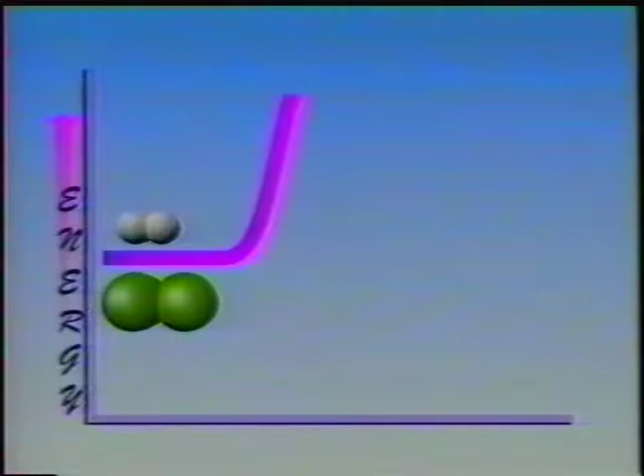Energy in the ultraviolet light breaks the molecules apart into atoms. When they react to form hydrogen chloride, the energy given out is released as the heat, light and sound of the explosion.

Heat, light, sound, explosions, such as the controlled explosions that drive the engines of cars. Everything that happens depends on energy transfer. Remember, energy transfers from high levels to low levels, becoming less and less useful as it does. So finally, will everything eventually run down?

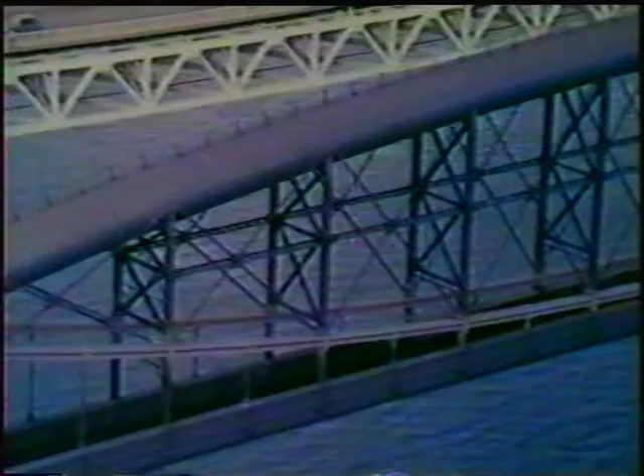But building it posed some major problems. Each of those spans weighs about 1,000 tons and is 150 metres long. They had to be built at ground level and then lifted into position, and also they had to be high enough so that large sailing ships could pass underneath.

Now this is a model of one of the spans, and remember that in reality these spans are incredibly heavy. This was actually built on the bankside, just where we are now, and you have to imagine that this is the bank, the span's sitting on it. How on earth did Brunel lift the spans off and get them into position?

Well, he'd got 1,000 tons here, about 150 metres, so he had big iron barges built, and he filled them with water, pumped water into them. So they were sitting a lot deeper in the water, floated them in under the span. And then he pumped the water out. Very clever. So they lifted up.

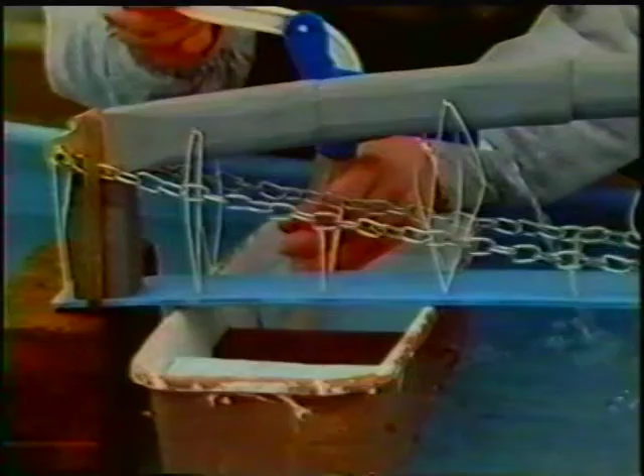But of course, in those days, they'd always choose water as a solution. They could use steam engines for pumping this, whereas we have to use these hand pumps.

Well, my end's coming up now. It's almost floating. How about yours? Yes, it's just about coming up there now. In a moment, we'll be able to float it out. So how did Brunel direct all this?

Well, just imagine it. It was a tremendous occasion with the great man himself standing there in the centre of the span. But it was absolute silence as he directed it, as if he was conducting a great orchestra. And they got semaphores and flags, all sorts of ways of getting messages to people, because there weren't any walkie-talkies in those days. It was a wonderful piece of organisation.

And then they pull them out on great ropes? Yes, once they'd got it floating, out it came. It floated off the bank on the barges, and they could haul it out with Brunel directing the pulling on the ropes, so they could pull it out, lower this enormous span down onto the base of the towers, and then they could start to celebrate.

They could make a noise again. But it must have been a wonderful sense of occasion that the Victorians had, a tremendous style that, in a lot of ways, I think we've lost.

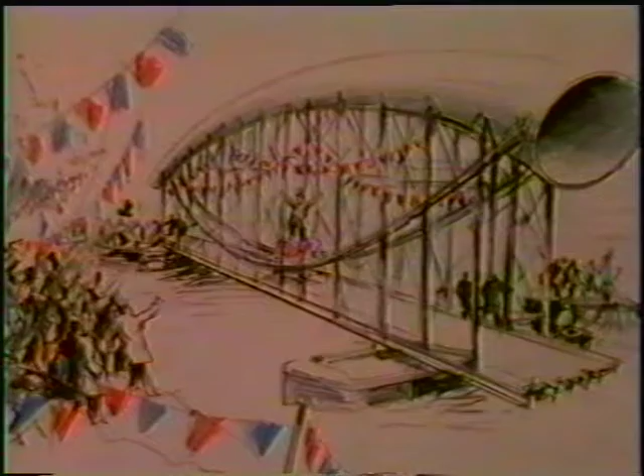Now, if you had to lift a really heavy weight a certain height, how would you go about it? That's the task for these 170 or so young problem solvers on day 3 of their course at Brunel University. This is the weight they've got to lift. Now, it's 52 kilograms, which is really quite heavy. It's almost as heavy as me, and I can't even budge it off the table.

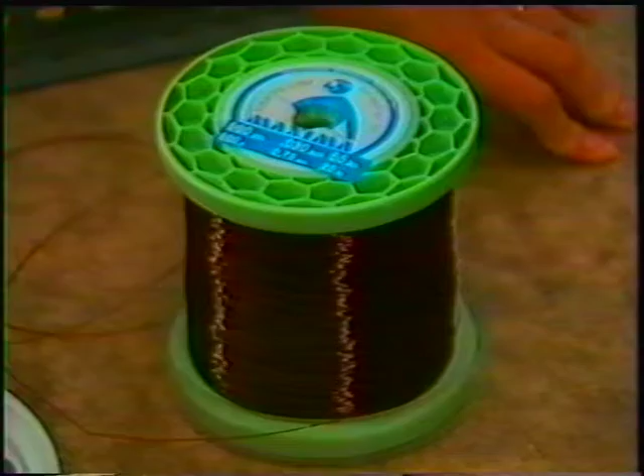So in order to lift it, they've been given these materials: some steel construction kit, including these strips, and the plates and nuts and bolts necessary to put it all together. Some fishing line, which, by the way, has only got a breaking strain of 25 kilograms - remember, that's a lot less than that weight. Some pulleys and spindles and the plates necessary for mounting them. Some casters so they can move everything around. And, of course, the tools.

Now, the idea this time is for each group to come up with a design that can be given to another group to construct. But there's more to it than just designing a method of lifting. We've got to lift it up out of a container, move it 30 centimetres and put it in another container.

How are you going to fix that? That's what I mean. Oh, you got bolts, haven't you? Yes, but fixing it at an angle, it's going to be unstable. Well, you get the trolley, it depends what we might have. If we have an A-frame. Yes, that's it, yeah. You've got the wire going up and over. So, you've got the pulley system here, a couple of pulley system here. So this some kind of on that handle attachment which you actually pull, which goes through the pulley system and then pulls it up.

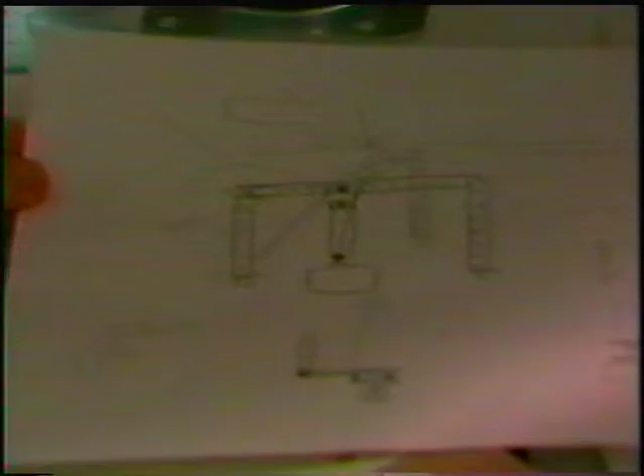That's brilliant, yeah. The cord we have only has a breaking strain of 25 kilograms, and the thing we have to lift is 52. So we've got three pulleys to split the strain.

What are you going to do with these plans, these sketches? These sketches are all being agglomerated into one main drawing, a sketch plan which will be given to the people to manufacture. Where do I get what from?

Communicating a design to a potential manufacturer isn't as easy as you might think. That's one, that's another, and that's another, but in the opposite, in that place. Is that section? Yeah, that's a...

It seems that most groups are planning to lift the concrete block with a pulley system. And then have pulley - I mean, we're not doing pulley, are we? Obviously, this group has a different idea.

Your 4 strings here, 2, 3, however you're going to tie that, that can be sorted out. And your 4 rollers, castors, on the spindle, going like that, coming out. So you have your 4 strings coming out, and you have your lever here. Yes, and it's all attached there. And then you've got much greater leverage than if you were doing it perpendicular. So you've got all this leverage here. So it's either a lever or a pulley system.

But are they sure the materials they're planning to use to do the lifting will take the strain? How's that going to hang in midair?

That is going to support 52 kilos, isn't it? Hopefully - well, it depends. The guy who said he knew about fishing said that they usually do underestimate the breaking strain - it's usually higher. And what about the design of the frame of the lifting device?

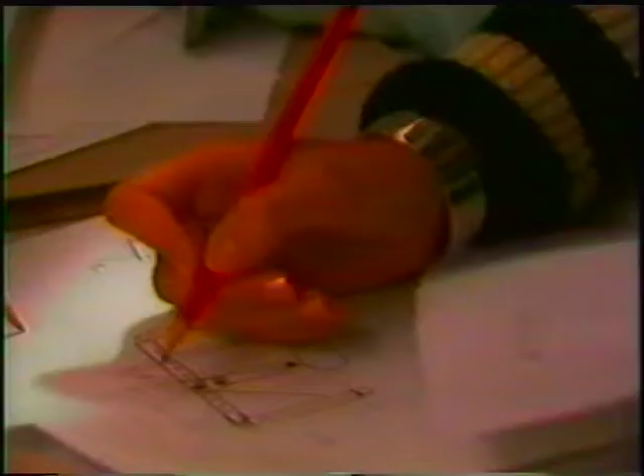I want you to explain to me how the Dexion is going to... Because there's one piece bolted together. If you bolted them together, yeah, these plastic end pieces won't fit on the top here. They don't have to because it's going to be covered.

It seems to have got quite a long way. Can you explain to me how it all works, lifting this heavy block? It's conventional third angle drawing.

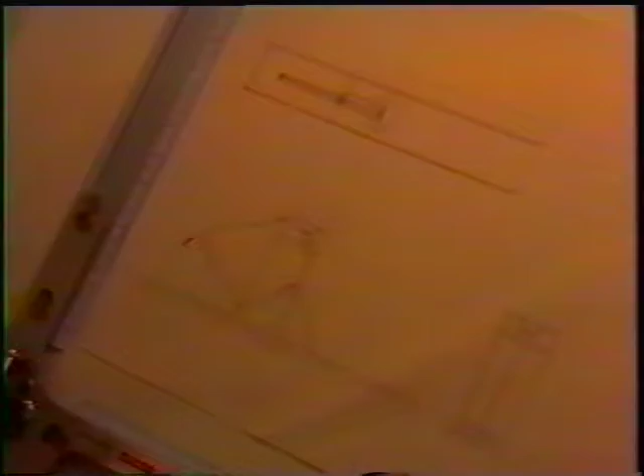All it is, is one drawing, or 3 drawings all in one. This is your plan, this is your side elevation, and this is your front elevation, as if you're looking at it from there. There's been a time limit - well, I'll let you get on because time's running out. That's right, they've had just 2 hours for the design stage.

These are the 6 designs selected which show devices to lift a concrete block. Let's take a look at one of them in detail.

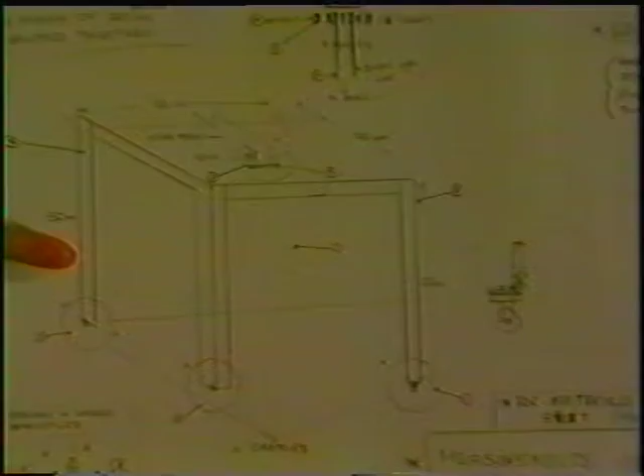This drawing shows the complete structure with measurements. Up here, we've got a detail which shows how the concrete block is attached to the lifting device. And over here, we've got a list of components and how much they're going to cost.

Now it's up to the groups to manufacture the various lifting devices that have been designed. Remember, each group has to work from another group's design, and they've got just 3 hours to do it in.

The first problem is going to be understanding the design instructions. You've just got your plans - what do you think of them? Well, we're looking for a list of what we've got to buy. Oh, I see, so really you don't understand what you need to start off with. Well, we've got to sort of count all the measurements out, so that they didn't miss anything out.

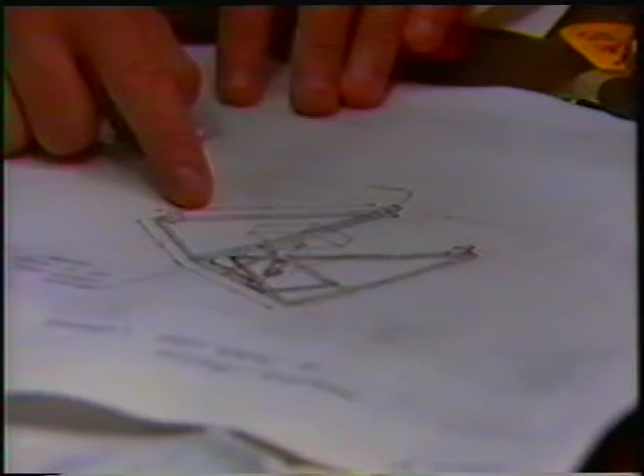What do you think of the plan as a whole? It looks understandable - that's a start. More than ours was. Wow, you think it's better than yours? Oh, definitely. They've also bodged up insofar as there's nothing to hold these from coming in.

Who chose this design? You're not looking really happy about your plan. No, we're not. Why, what do you think's wrong? Haven't taken a lot of things into account.

Yeah, I mean, fair enough, they couldn't actually work with the materials. They've told us to round off some of the materials - it's going to take us ages to file it down. They just haven't taken everything into account.

So it's a bit slap-happy. Yeah, you just have to make some modifications. They haven't. Modifications are allowed, but they'll be taken into account when the judges make the final assessment.

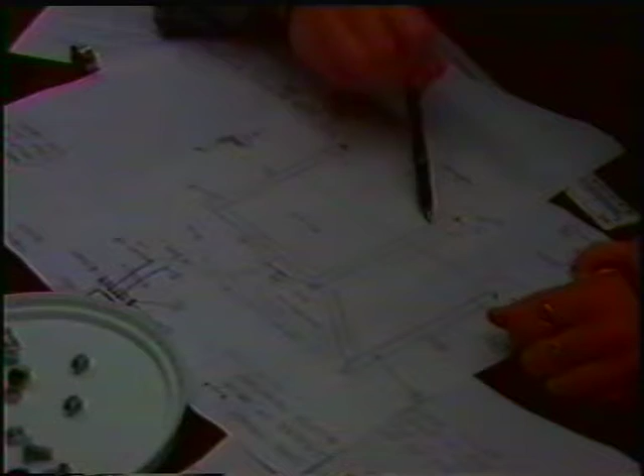Well, they haven't put anything about actually lifting it. This is their pulley design, and all it is for attachment onto the block, which would be sort of in the middle, underneath the frame. So we don't know how we're going to actually incorporate something else, modify this, so that we can actually lift it. Well, let's hope those problems can get sorted out during the making.

Does this match the plan which you were given? Not quite, we've made modifications. Can you show me what modifications you've made?

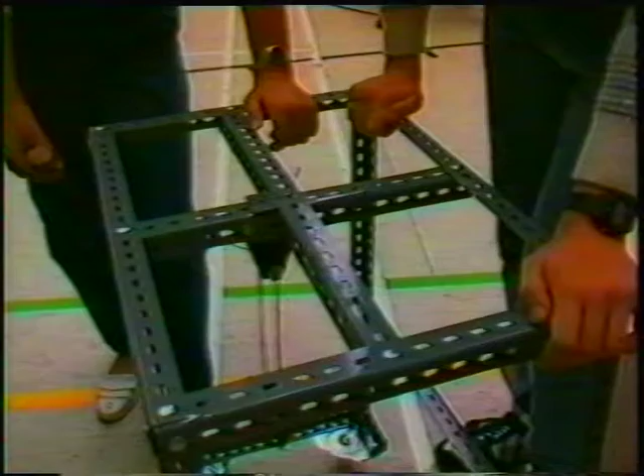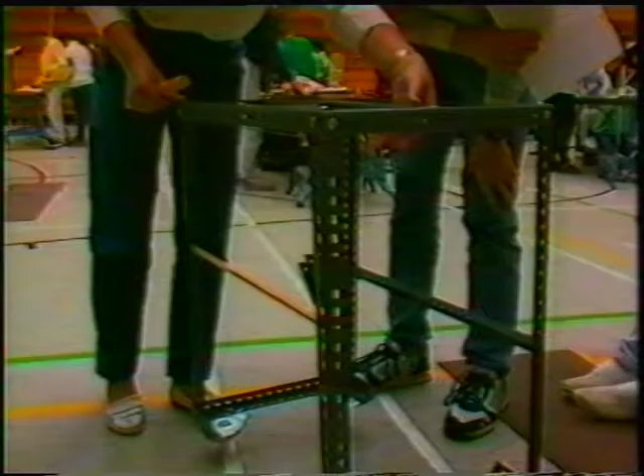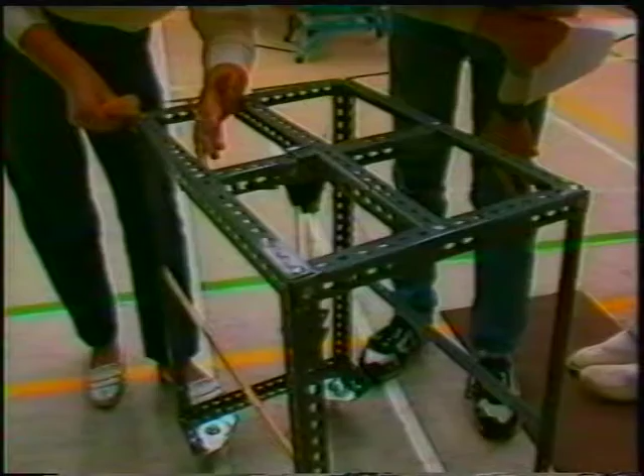One of the things was we removed the collar from the top one because we found it was a bit too broad to go in there. And on the design, there was a stub on these crossbars, another piece fitting around made into a U shape, but we thought we'd better leave that out because we would have used up more Dexion than we were permitted. So we eliminated that. We've also doubled this nylon cord for safety reasons, so if one snaps there's always a backup.

Sounds like a belt and braces policy. Well, this looks as though it's reasonably complete now. How's it going to work? Well, we can't push it over the block, we have to carry it.

The design has to allow the block to be raised at least 15 centimetres vertically, but it must also provide a means of moving it horizontally a distance of 30 centimetres. This looks like a novel way of doing it. Block like this underneath, the shackle goes right down here.

How did you find the design that you had before? All the measurements were too short, so we had to put legs on it. So you had to modify it somewhat? All of it.

Have you made any changes from what was on the original plan? Well, quite a few, we did have a major problem. Once we'd actually sorted out the size, we found we did have these plates fitted on here, this spindle down here.

But we were given a measurement, from the ground up to the bottom of the actual shackle which holds the block. And when we actually made it, we discovered that we did not have enough height, because before it couldn't go up any higher than the metal bar was down here, and there wasn't enough height, you see. So we had to abandon the idea of the metal bar, which did weaken it a bit.

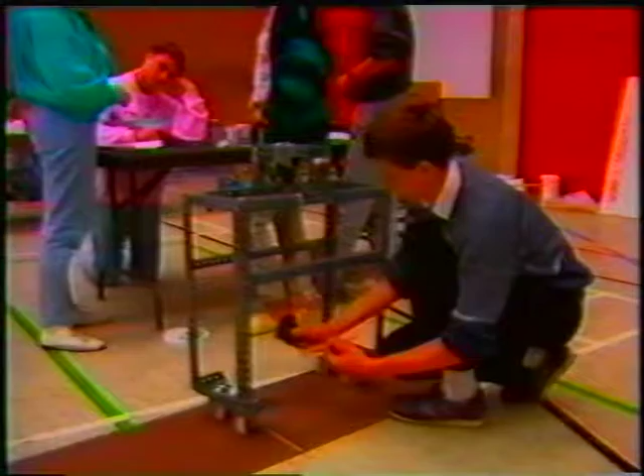So now we're hoping that the Dexion will actually support the weight from here, and we should just about make it by centimetres. Let's hope that'll do the trick. Well, this looks fairly sturdy. How is it actually going to work?

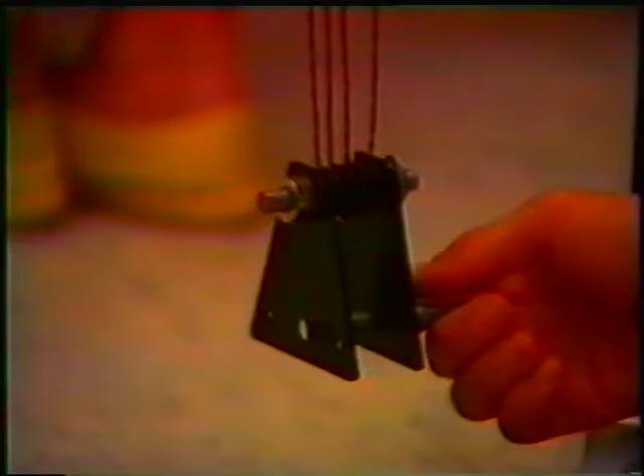Well, first of all, we shackle it onto here by taking this out, putting the shackle in there, and then slotting this through the shackle. So that's back on, and that will hold the weight. And then pull on this.

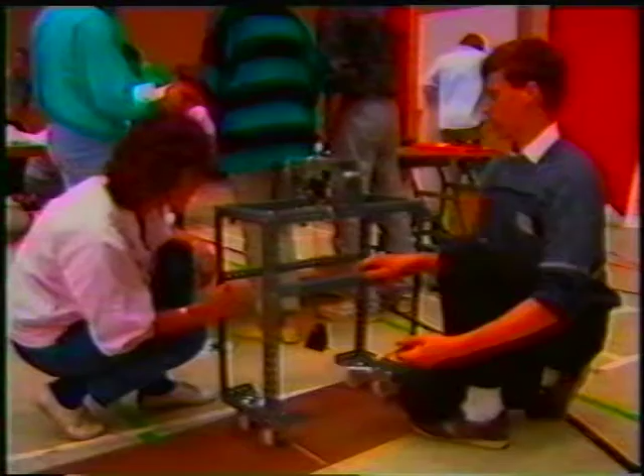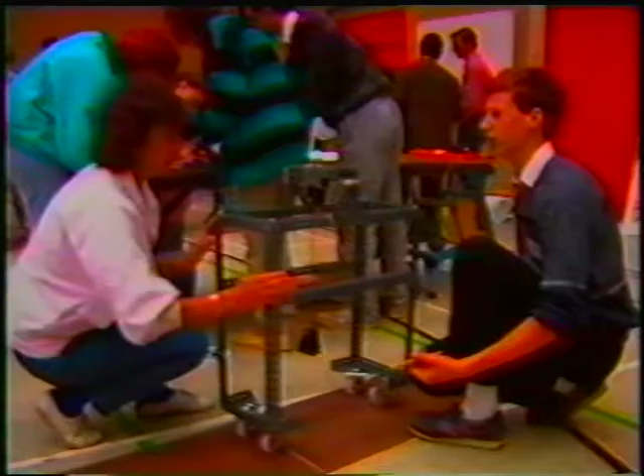And now for the judging. Well, the first thing they've got to do is pay their bills. Theirs cost $320, which is very expensive.

The cost of making each design is an important factor in the judging. The cheaper, the better.

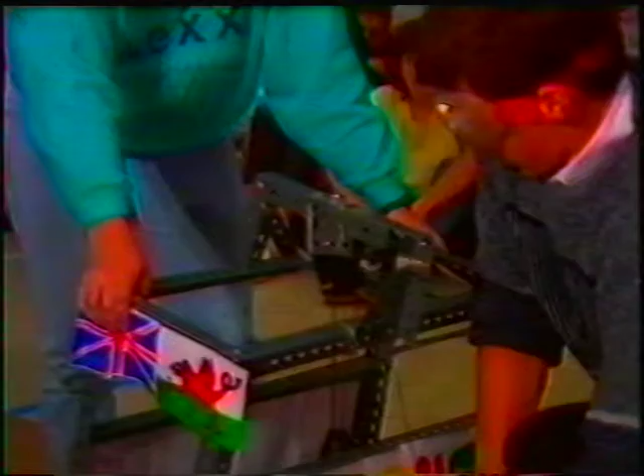For an expensive design, this one doesn't look too hopeful. Thank you very much.

Never mind, at least it wasn't their design, they were only the manufacturers.

A relatively cheap one now, $204. The first of the lever designs.

Success! Oh dear, what a pity.

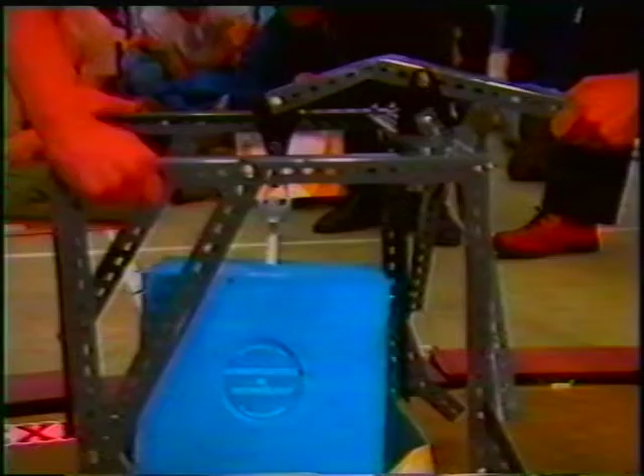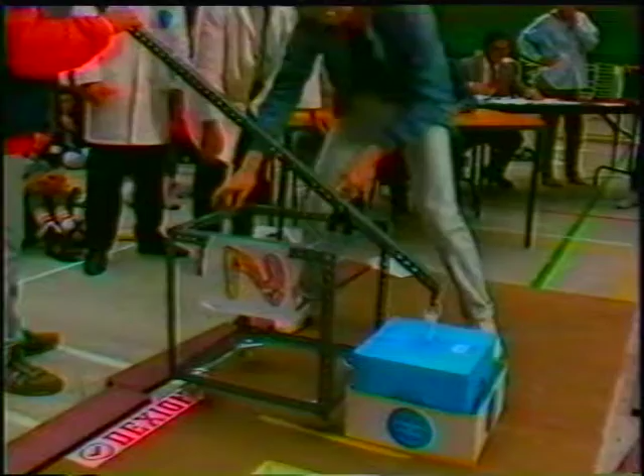Another inexpensive design on the lever principle. Oh dear, the same problem as before.

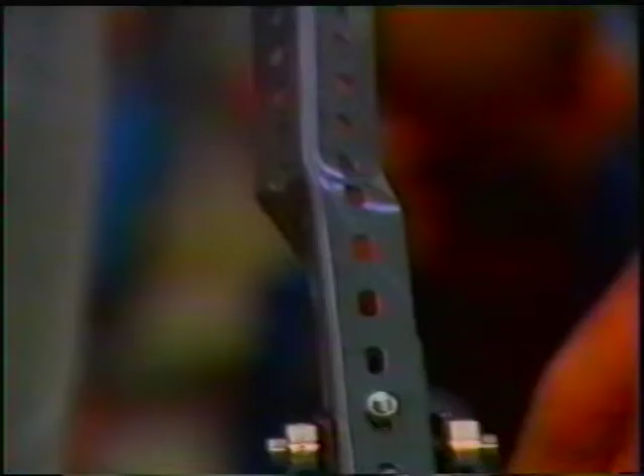This one costs $256. Safety's another important criterion. How safe is this one?

Now, will the fishing line take the strain? What's happening to the feet? Not his feet.

Can you see? But it's lifting. It's looking good, but oh dear, it's the mountings for the casters that won't take the strain. That's going to make it very difficult to move the device along.

They're succeeding. Now they have to lower the concrete block into the box.

Well done. The next lifting device cost $256 to build.

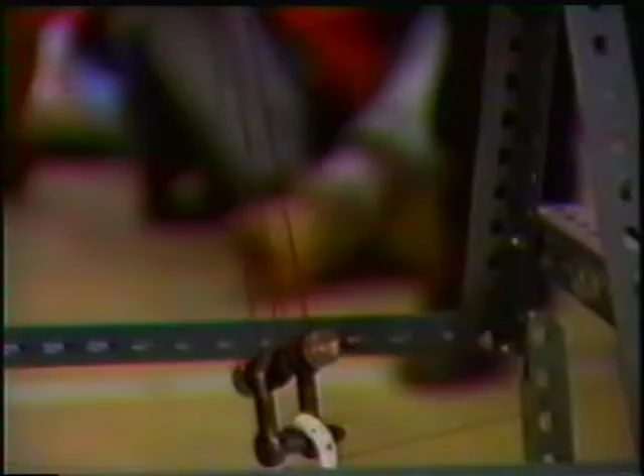Here's another device using a block and tackle, but the method of moving the concrete block across from one box to the other is very different.

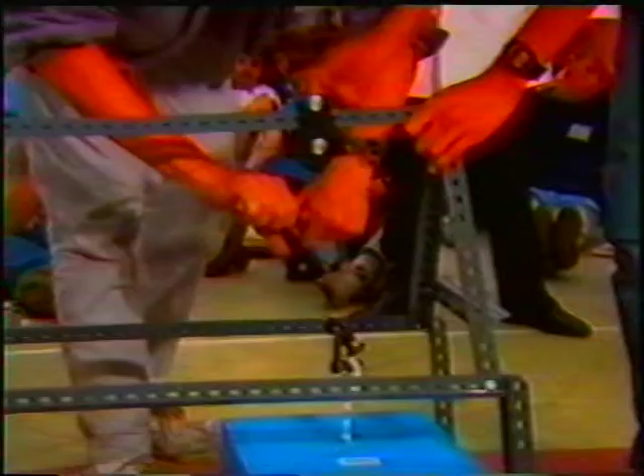The next one's another expensive device, $318.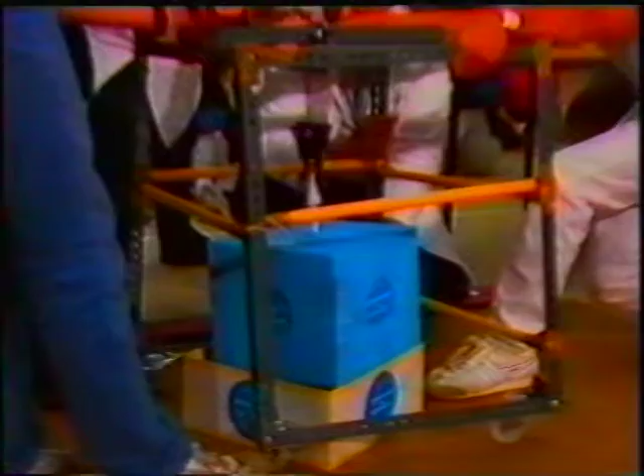This one's looking good. Never mind, it was a good try.

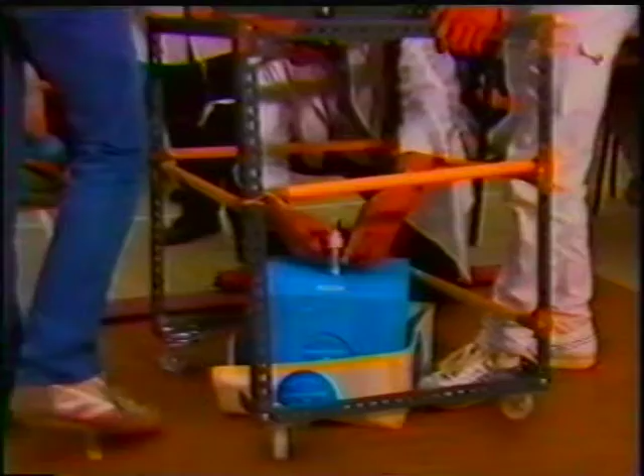The next group's device cost $188, which is not cheap, but it's not expensive either.

The supporting structure on this design uses an A-frame, but it's not so much the frame design that seems to be the problem, it's more the lack of strength in the fishing line.

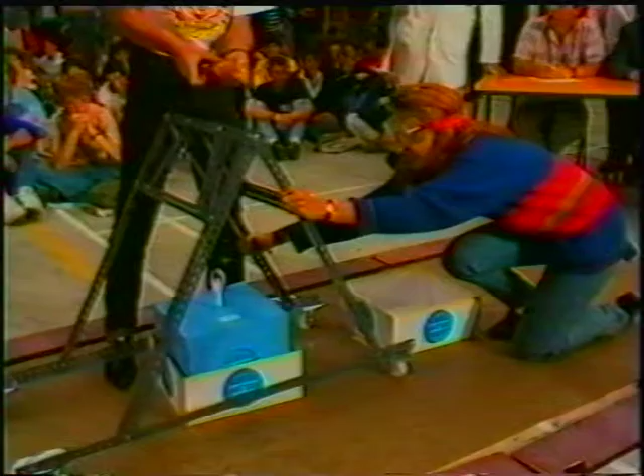Or is it? It's above there, isn't it? Yeah.

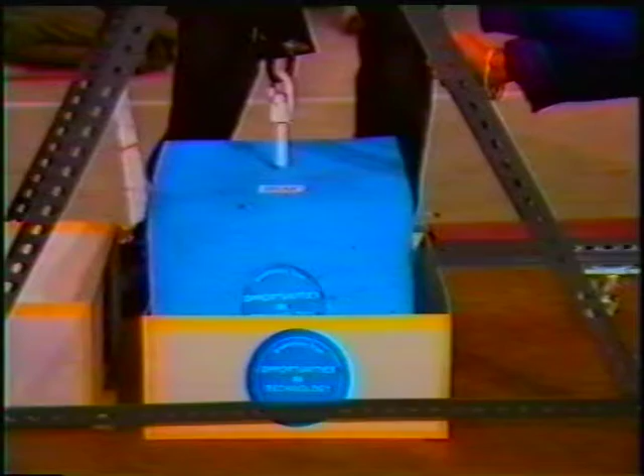Another successful solution to a hefty problem. But what about that hefty problem facing Brunel, lifting those weighty spans of the Saltash Bridge into place? We know how he moved them away from the bank, but that was only half the problem.

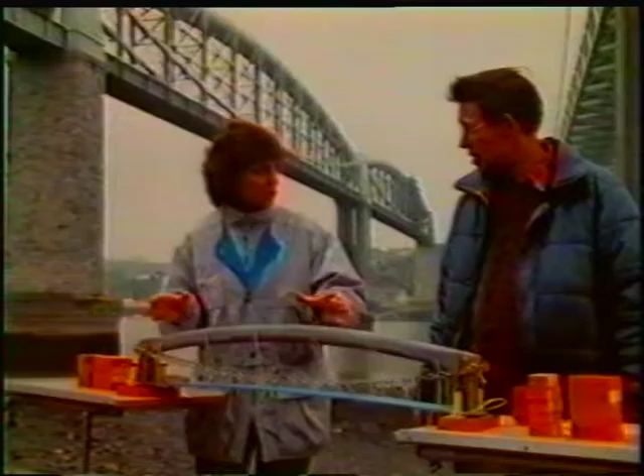So I suppose that once Brunel actually floated the span into position, he could then fill the barges up with water so they'd sink down, then the span would go down as well and rest on the base of the piers. In fact, the very piers that are behind us now. That's not much good as a bridge, I mean you can't fit any ships underneath. How on earth did he get them up there?

Then he'd be using water again, Sue. You see, these are hydraulic jacks, this end and that end of the bridge, and he pumped water under pressure into them, like this, you see, so that they start to lift the bridge up.

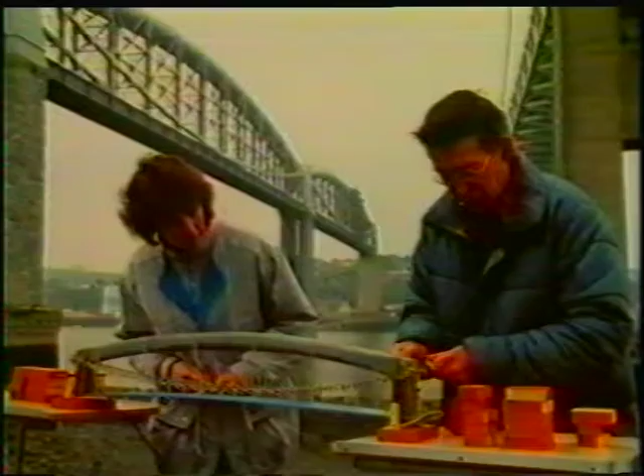It's lifting right off the base of the piers. Yeah.

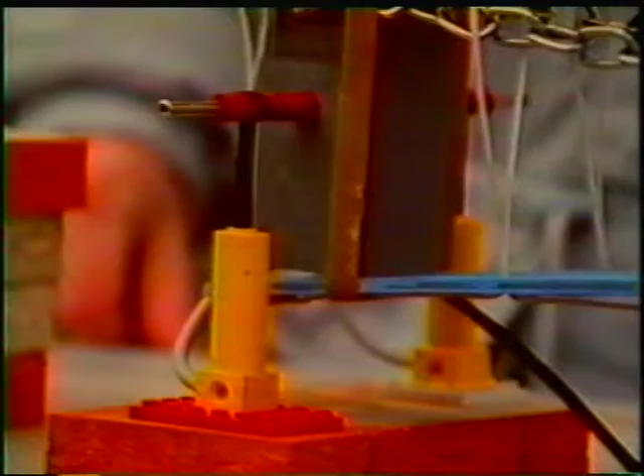And once he'd actually got it up about a metre, they'd hold it up on the jacks, and then build masonry under the span to hold it. Would you like to put a block in under yours to simulate the masonry, so they could support the bridge?

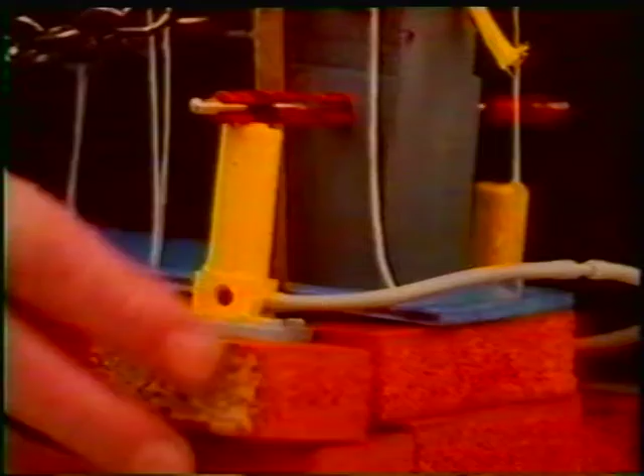Right, you call this jacking and packing. Once it's packed underneath safely, they can take the pressure out of the jacks, the weight will take the cylinder down. Now we can lift the cylinder up. Can you do it the same your end? So they lift the cylinder, and then they'd build masonry underneath that. Underneath the jacks themselves? Underneath the jacks.

Is your end okay? No, we'll start all over again. Start pumping. That must have taken a long time. Well, it took them about a year. Perhaps you can work out a quicker way of doing it.

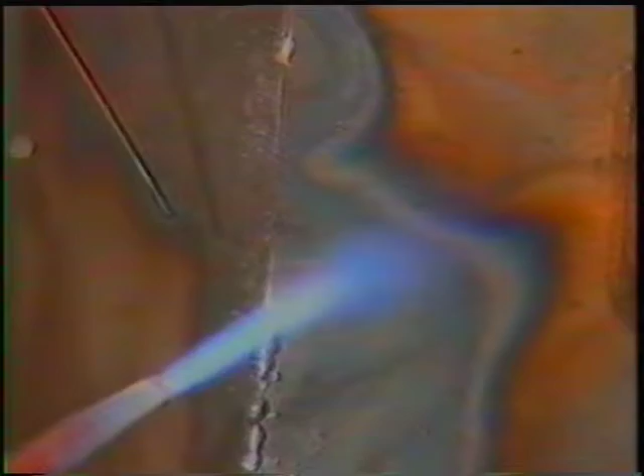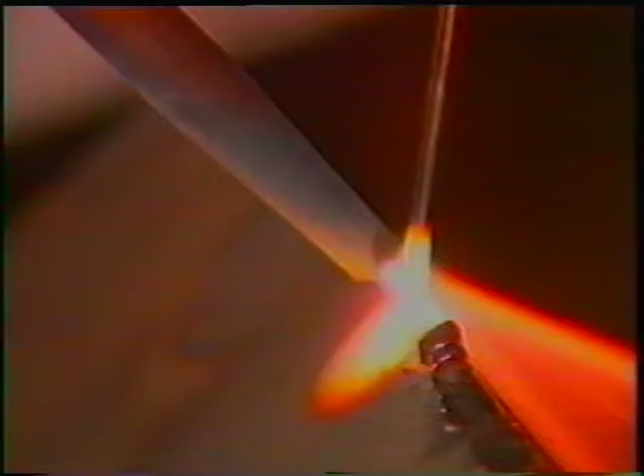Apply heat to the iron until it's red hot. How hot? Well, you know you can measure hotness with a thermometer, but you can show hotness by using a thermographic camera. Watch this. So what is hotness, and why is it spreading out like this?

Let's start again, but this time with the atoms. This model shows iron atoms in a piece of iron. They're always moving, they have kinetic energy. Hotness is a measure of the kinetic energy of atoms. We'll apply heat to the weld area. Some of the hotness is transferred to the iron atoms. As their kinetic energy increases, so does the temperature of the metal.

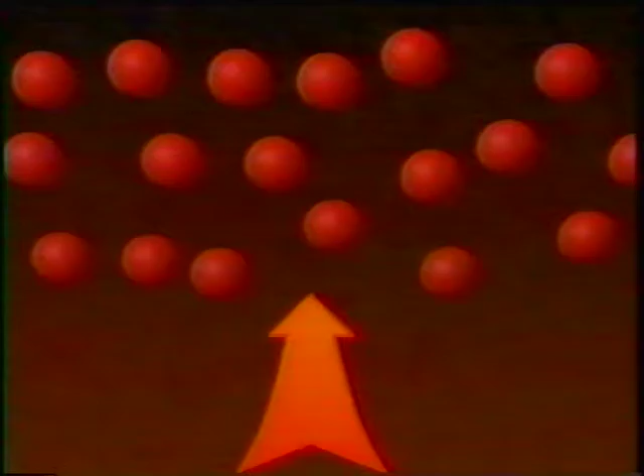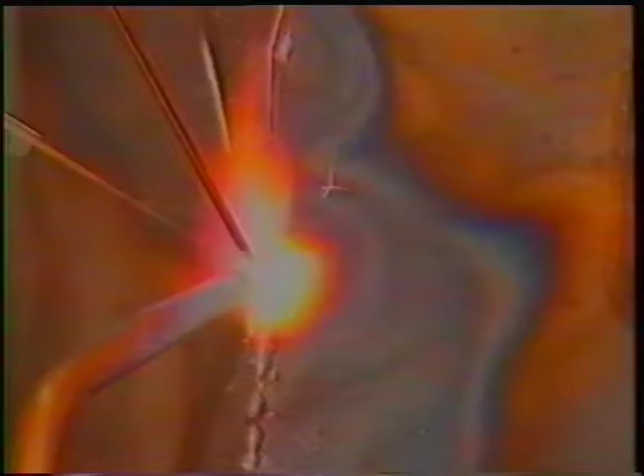As the welder applies the flame to the metal, energy concentrated in the flame transfers to the metal and does useful work. Unfortunately, whenever heat is transferred, some of it is transferred to the environment and becomes so dilute that it can no longer do useful work. This is called lost heat.

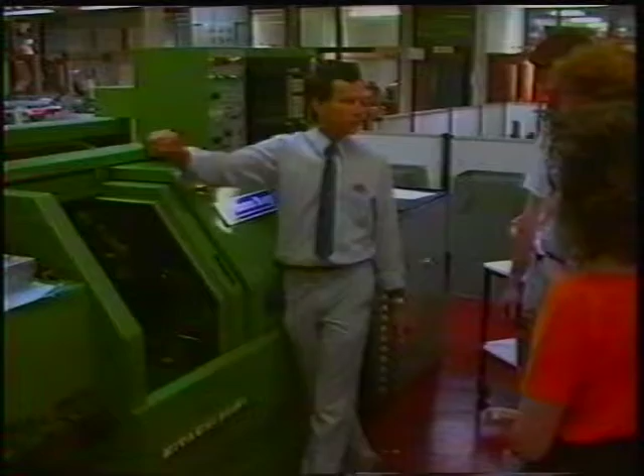In many situations, it's important to control the amount of heat transfer and the amount of heat loss. Often, the designer and the engineer try to reduce both. Why should that be? Can you think of any examples?

Here's the 840 to Peterborough. Switch to thermography. The hot areas are light, the cold areas are dark. The engine looks hot as you'd expect, but look at the wheels. They are literally glowing with heat where they run on a steel track. Why are they so hot?

Where any two surfaces rub together, friction causes heating. Some of the kinetic energy that would have performed useful work is being transferred to the wheels, causing them to become hot. That heat is lost into the cooler surroundings. The thermographic camera detects it as it radiates from the wheels into the air.

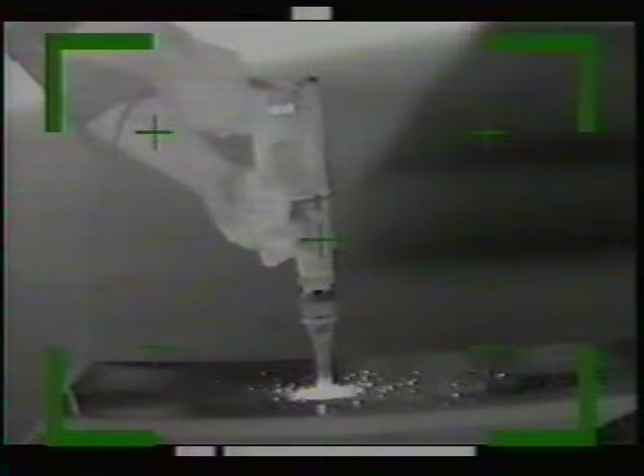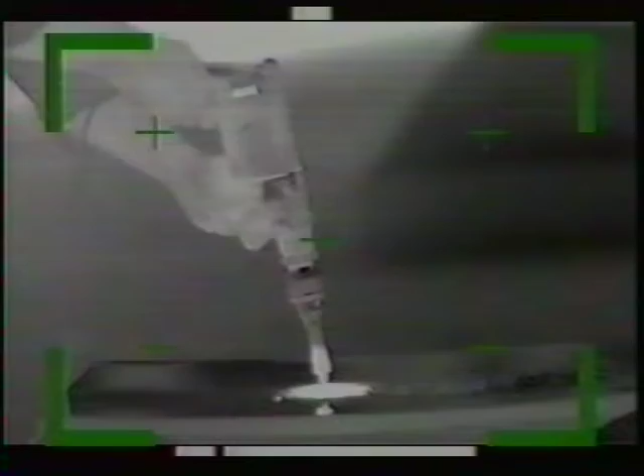It takes energy to do any kind of work, such as drilling a hole. Now watch this. Heat is being generated and then lost into the environment. That means there's less energy available to do useful work, so the drill's efficiency, like the trains, is reduced. Could we improve efficiency by reducing the amount of heat being generated? How would you reduce it?

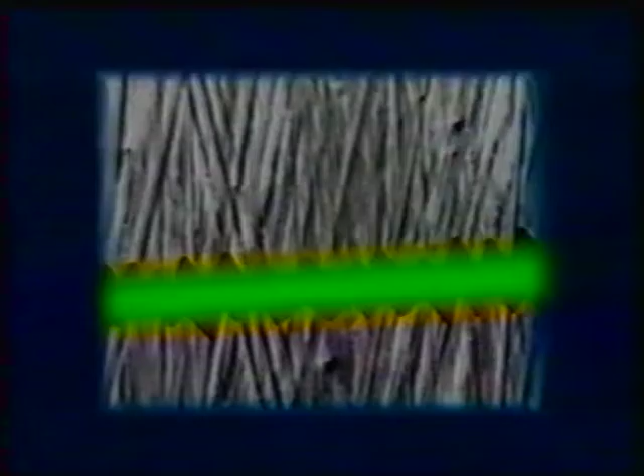Look at those piston rods. Moving metal surfaces seem smooth enough, but magnified 10,000 times, you can see how rough they really are. Oil forms a film over the surface of the moving parts and keeps them apart. The friction and the heating is reduced, and mechanical efficiency is improved.

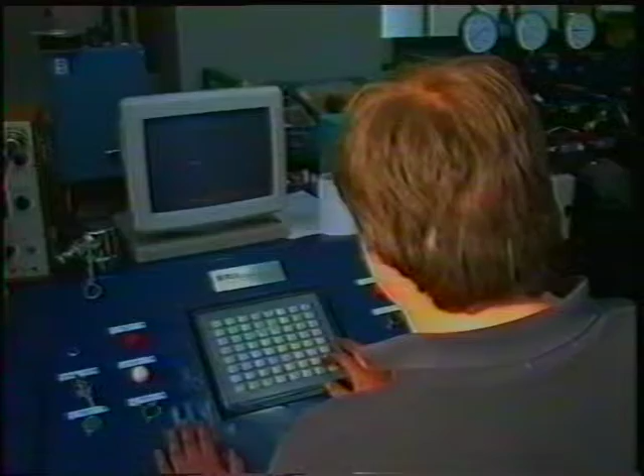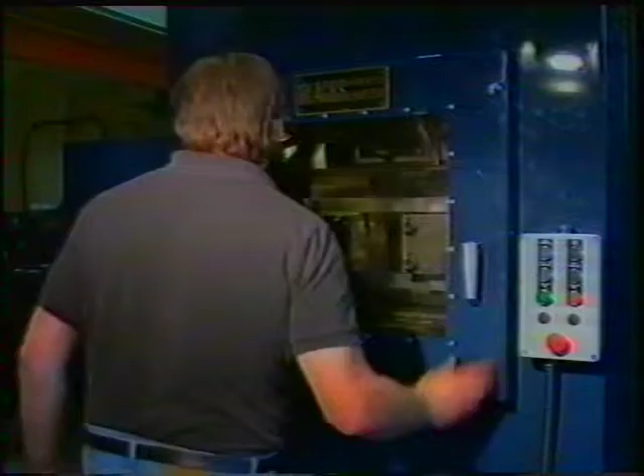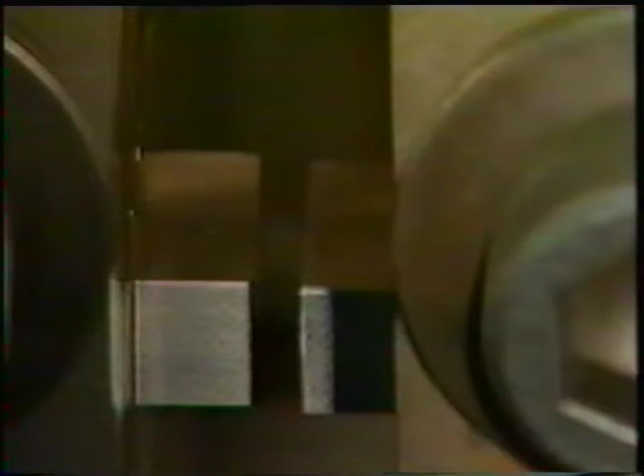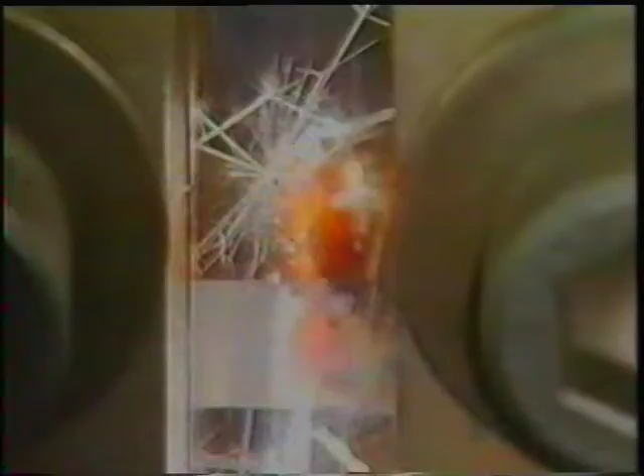Take one cube of titanium metal, drive it towards another cube of titanium, and start it vibrating at a high frequency. What happens when the two pieces of metal meet? At the point of contact, kinetic energy is transferred to the atoms in the metal, so the temperature rises until it melts, creating a weld.

Friction and heat transfer can be very useful. But heat transfer doesn't only occur with friction. The electricity that drives the friction welder comes from an electrical substation many miles away. What do you think happens when energy is transferred as electricity?

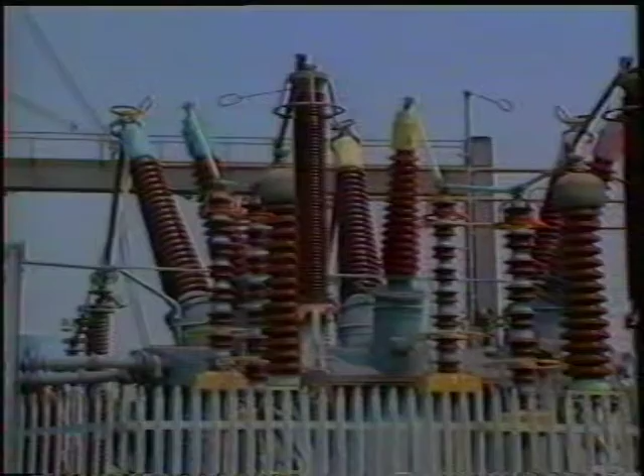High voltage electricity is dangerous to work with, so the high voltage is transformed to a low voltage by transformers, like this one. And, just as you'd expect, some of the incoming energy is causing the transformer to get hot.

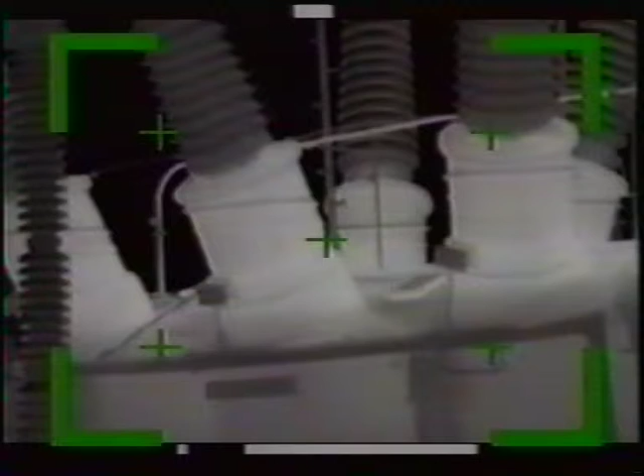Less than 0.5% of the energy is causing heating. But that's enough to cause serious damage, unless the engineers can get rid of it. How do they do that?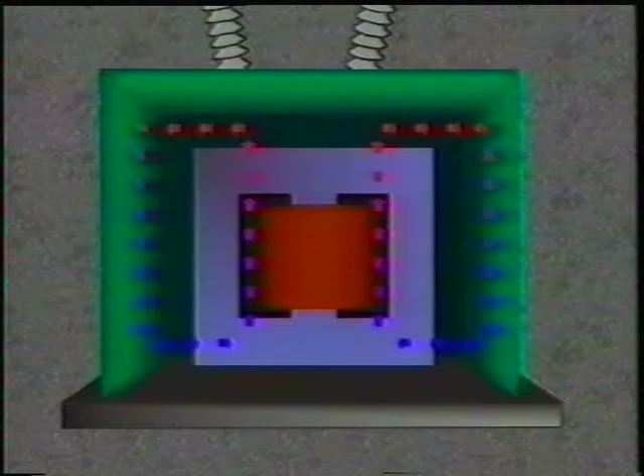Heat is generated in the transformer's iron core and copper winding. To carry the heat away, the engineers place the transformer in a container of oil. Heat travels into the oil, and then to an outside surface where it's lost into the air.

How would you increase the rate of heat loss? In large transformers, heat loss is increased by increasing the surface area with cooling pipes and using pumps to increase the flow through the cooling circuits. In very large transformers, fans blow cool air across the cooling pipes.

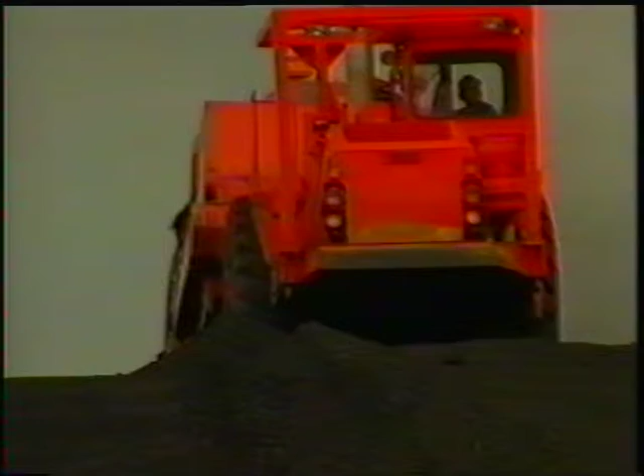The engineers went to a lot of trouble to increase the rate of heat loss. But what about the enormous amounts of heat loss that take place at power stations, where the electricity is generated? Although modern power stations are efficient, quite large amounts of energy are generating heat which is transferred to the environment and lost. Here, the engineers do their best to reduce heat loss. Where does the heat loss take place?

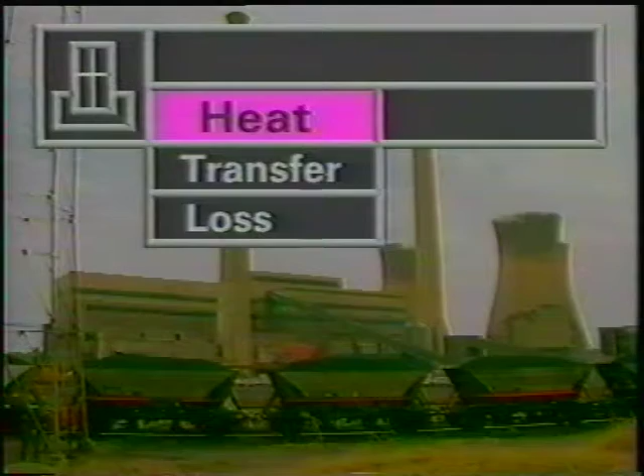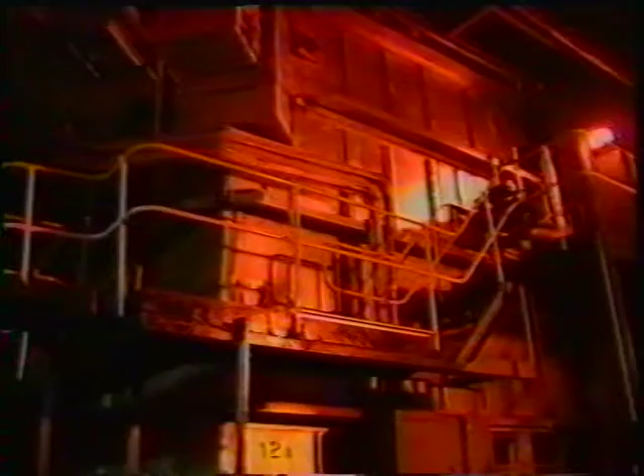Now we're inside one of the boilers, which has been shut down for maintenance. Each boiler is as tall as a 6-story building.

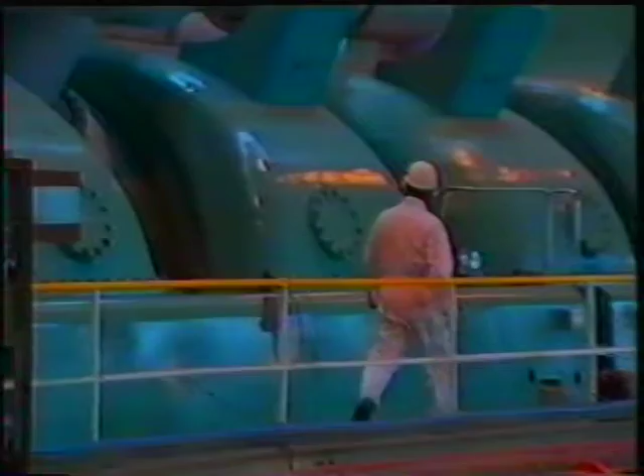The kinetic energy in the steam drives the turbines and the generators, where it is finally transferred as electricity. The exhausted steam is cooled down to water in the condensers and returned to the boilers. We'll get a better view of the power station from above, and to see where energy is being lost as heat into the environment, we'll change over to the thermal camera.

The smoke from the chimneys looks hot, but there's a lot of heat escaping from the top of these cooling towers too. It's not smoke, so what is it? Here's a diagram of the cooling circuits.

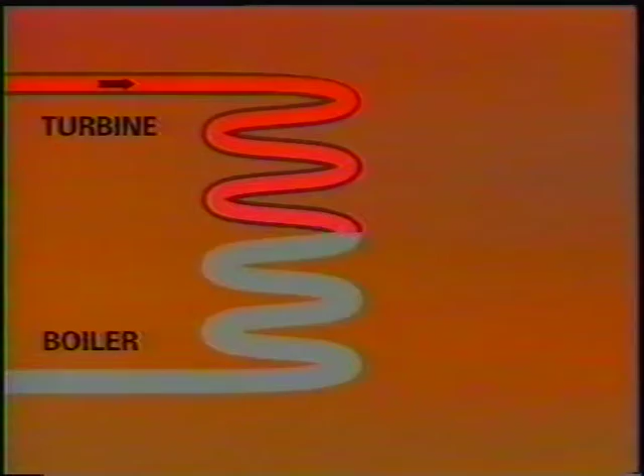When the exhausted steam leaves the turbines, it must be cooled down to water before it can be pumped back to the boilers. This is done in the condensers, where heat transfers from the steam in the boiler circuit to cold water in the cooling circuits, raising its temperature.

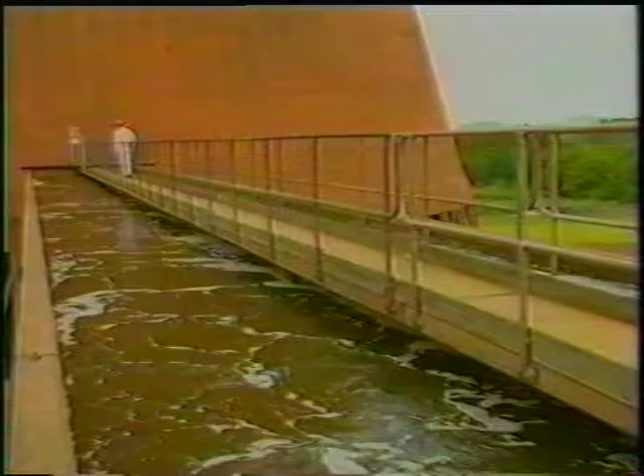If the water in the cooling circuits gets too hot, it won't cool very effectively. So how can heat be lost from the cooling circuits? The water is pumped into these enormous towers and is air-cooled before it returns to the condensers. The cooling towers are designed to transfer unwanted heat from the cooling circuits into the environment.

Here's another power station, near London this time. Notice any difference? No cooling towers. If you wanted to use the environment as a heat sink, somewhere to get rid of unwanted heat, how would you do it?

No need for cooling towers when you can draw cool water from the Thames and pump the warmer water straight back into it. You can see the warm water forming a plume downstream from the outlet in the river, cooling as it becomes more dilute.

Pouring heat into the environment is sometimes called thermal pollution. What do you think it's doing to the local plants and animals? Certain water plants and some animals, such as these caddisfly larvae, thrive in the warmer water. Mayfly nymphs increase their numbers dramatically. So do the leeches.

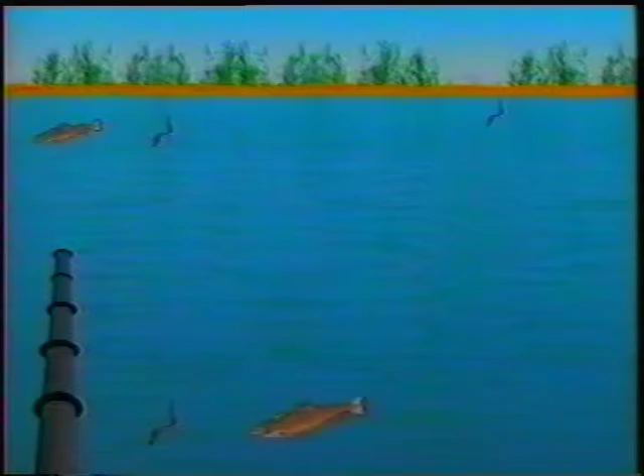Most species of fish, such as trout, decrease in numbers in the warm water, but grow more rapidly than normal in the cooler areas downstream. At the warm water outlet, the highest temperature is red, cooling to brown, and then to purple. Why should the different species be distributed in this way?

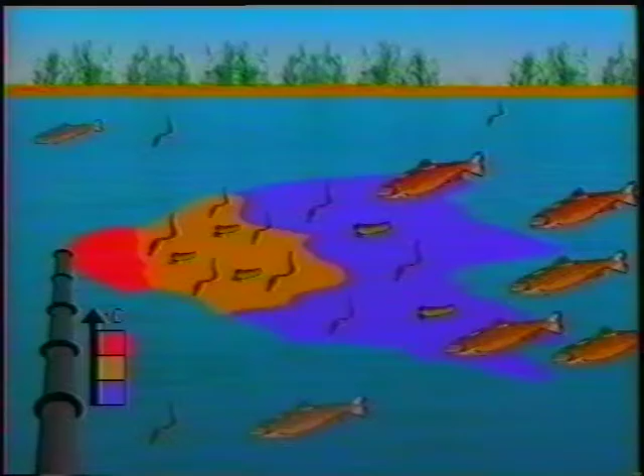Could the waste heat from power stations be used for anything? Some power stations sell their waste hot water to local homes and factories. And what happens to it there?

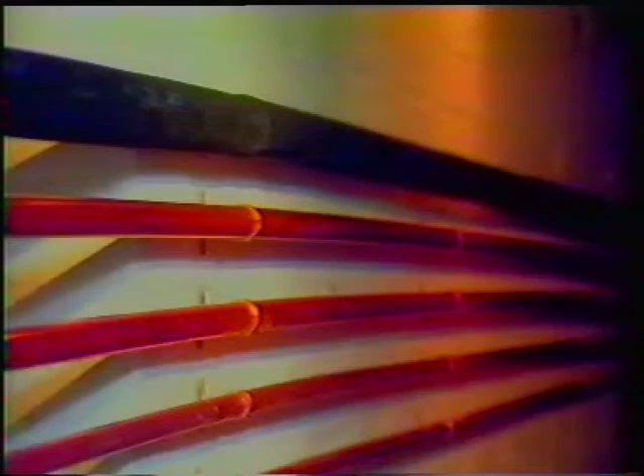We'll use a different kind of thermography to show that in these hot water pipes, heat is lost into the air. Flowing from left to right, the water gradually gets cooler. The top pipe contains the same hot water, so why should it look so different? It's insulated. The surface is cooler because the insulation has reduced the rate of heat loss. And because the pipe gives off less heat, its contents...